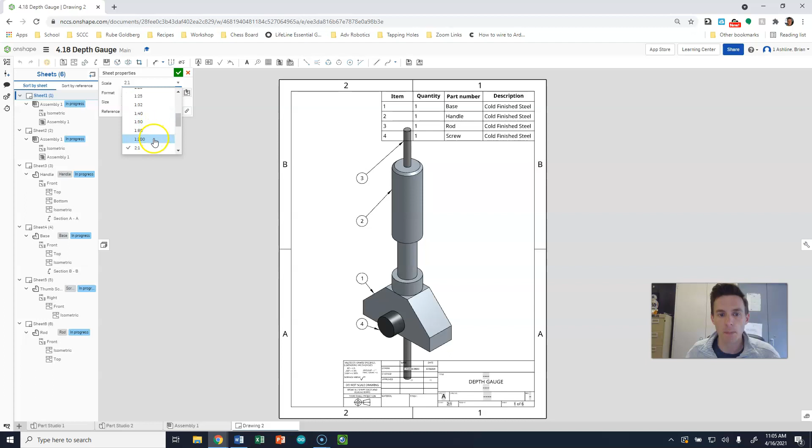So I could go to, let's say, a 2:1, and notice it changes the size. It also changes my scale down below. We also can see that honestly it's too big for that. So we're going to slide back up to 1:1 and we're going to leave it right there.

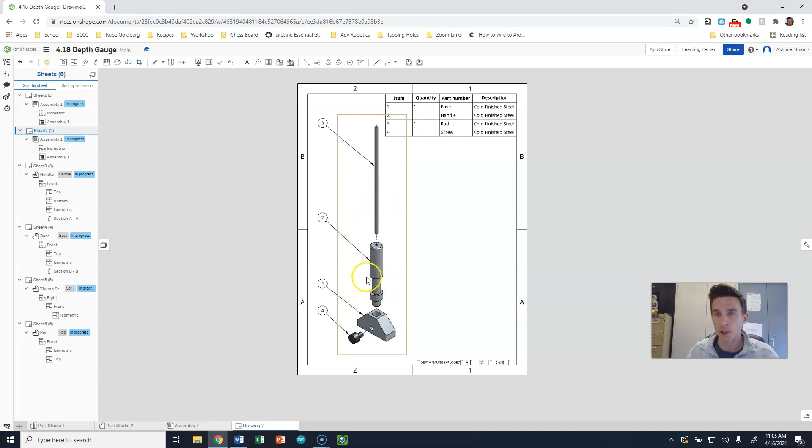As we move into sheet 2, we have our exploded view drawing, okay? And again, we have our bill of materials, we have our exploded view, which again should be arranged so that the base is at the bottom, and then these pieces build into it, and the screw comes in from the front. We have our part balloons, we also have our name and our proper scale.

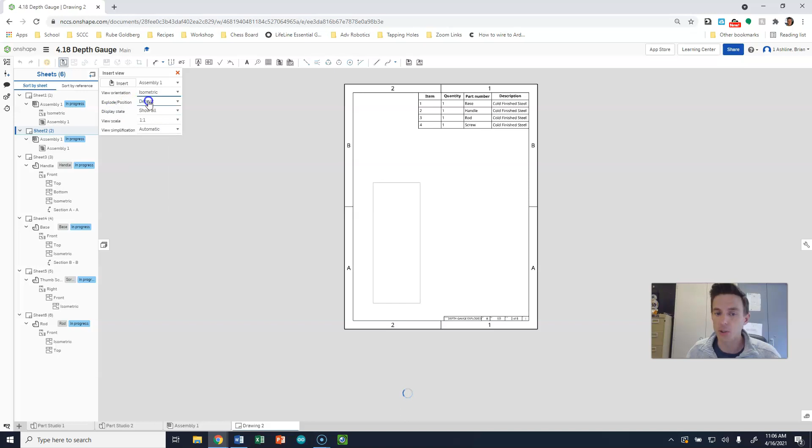Now I want to show you really quick how to put this in again, so I'm going to delete that. I'm going to go to Inserts. I want to select my assembly. I want to select an isometric view of my assembly. And underneath Explode and Position, right now it's default. We want to go to our exploded view. So mine's called Explode 1.

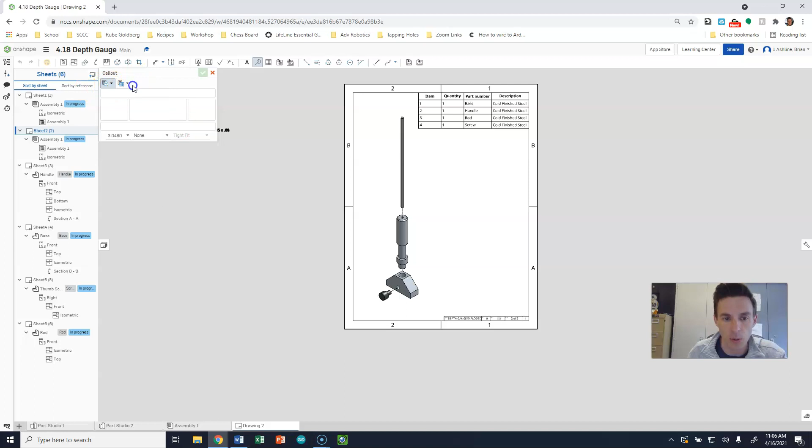We can wait till that thing loads up. We can then drop our exploded view in, right? And again, we're going to show our shaded view. We're going to pull in our callouts, which have been changed now that I've changed things around. So I'm going to bump this back. I'm going to say that I want it to be my part number. It's going to be a circle. You probably won't have to do that yet, but you might have to do that in the future.

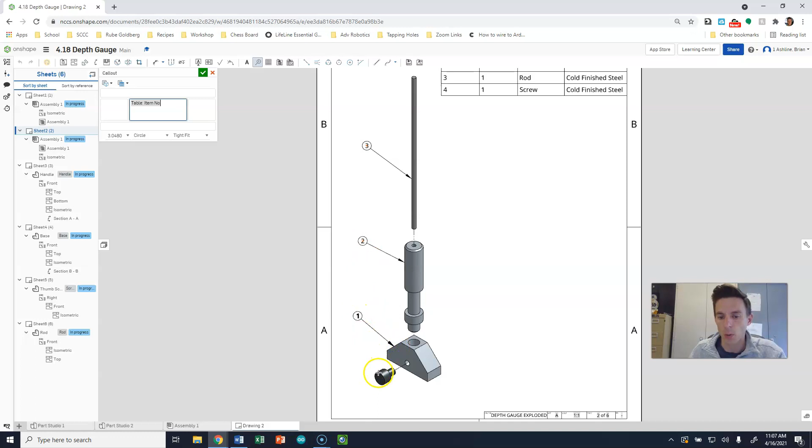Oh, not that. Yeah, I really needed to turn on my item number. See, it has my name there. So now I can come through here, put in my item number. Delete this one. I can continue with that process as we go down. Drop 2 in, drop 1 in, and finally drop part number 4 in.

Okay, now we're moving on to our next sheet, which starts all of our part drawings. Sheet 1 is always going to be your cover sheet. Sheet 2 is going to be your exploded sheet. But as far as your part sheets are concerned, I really don't care what order they come in exactly. Alright, so I'm starting with my handle. So let's just start with that.

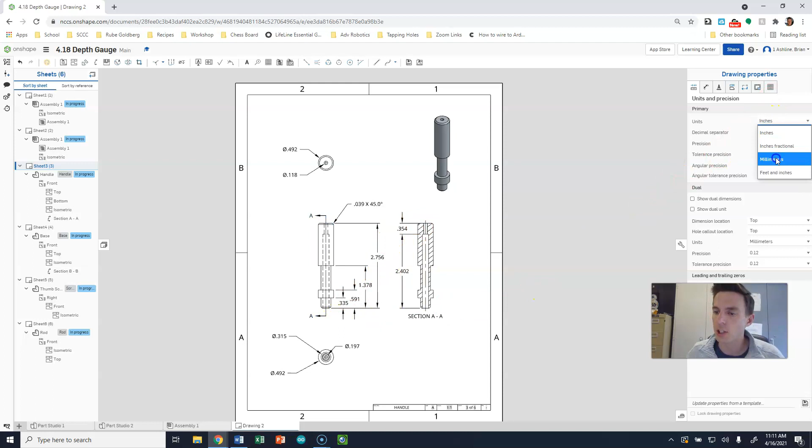The first thing that you're going to need to do for this drawing is change from inch units to metric units. We drew it in metric units already, but as you go to dimension, it's going to be dimensioning automatically in inches. So we need to change that first. So we're going to go to the drawing properties on the right. Currently your unit properties are going to be set to inches. You can see that everything has changed to standard dimensions. We want to change that from inches to millimeters so that we have the proper unit. Okay? So once we have that set, then we can start going through to set up our dimensions.

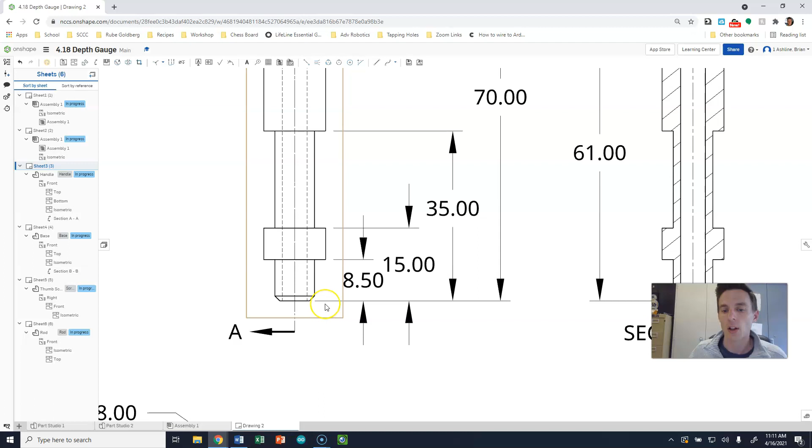And for this piece, because there's so many different parts, I have elected to use what is called baseline dimensioning, where all of my dimensions, especially in this view, land at the same point, which is the bottom of my piece. Baseline dimensioning is actually really great for manufacturing too, because you can measure off of the same point over and over again.

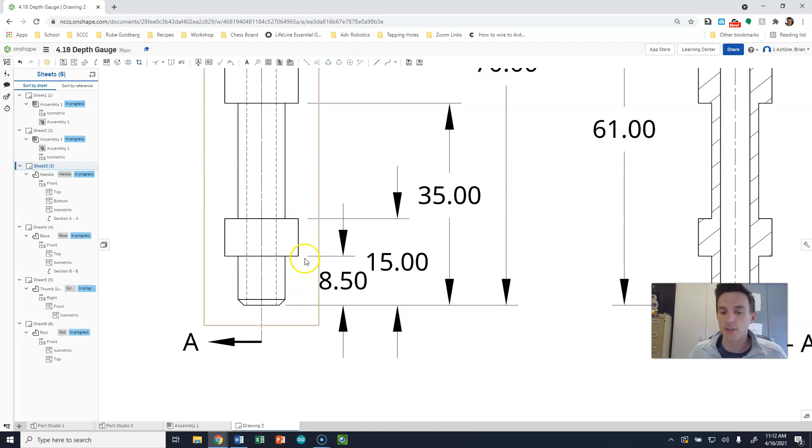So with that being said, when I went through to dimension, I dimensioned from my lines over and I selected my 8.5. And again, it's important that you're selecting the right side of your line. So if I go to dimension and I select a line and a line, oops.

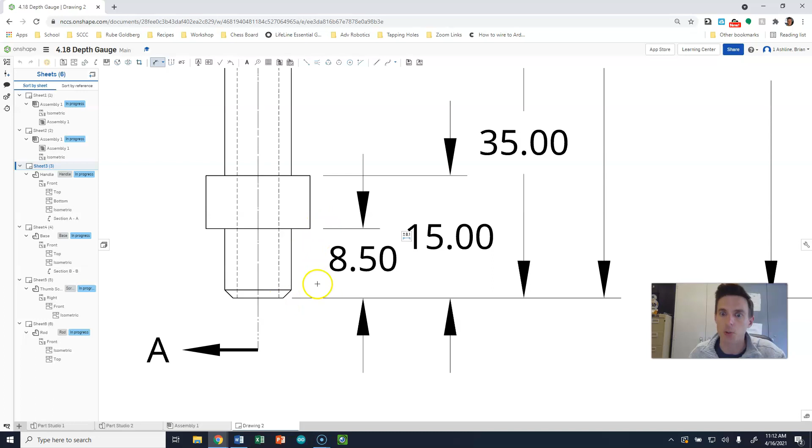Select the line and then this line here, it automatically puts a gap between my extension line and my object, which is great. If I were to dimension from, say, a point across the board and then bring this over, you can see that there's no gap between here and here, which is not ideal. Ideally we want gaps between our dimensions.

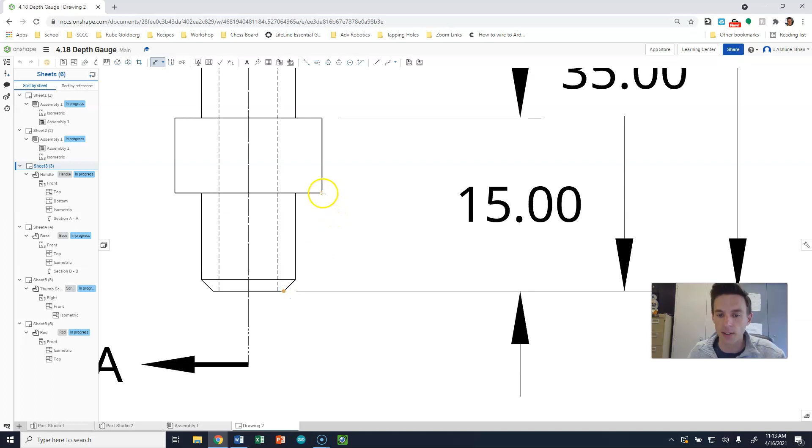So I would just delete that and draw it again, and I could totally select this edge to this edge, or that corner, and then drop it in at that point there. So I have my smallest dimension, which is 8.5 millimeters, my next dimension, which is 15, my next dimension to here, which is 35, and then finally my last dimension, my total height, which is 70.

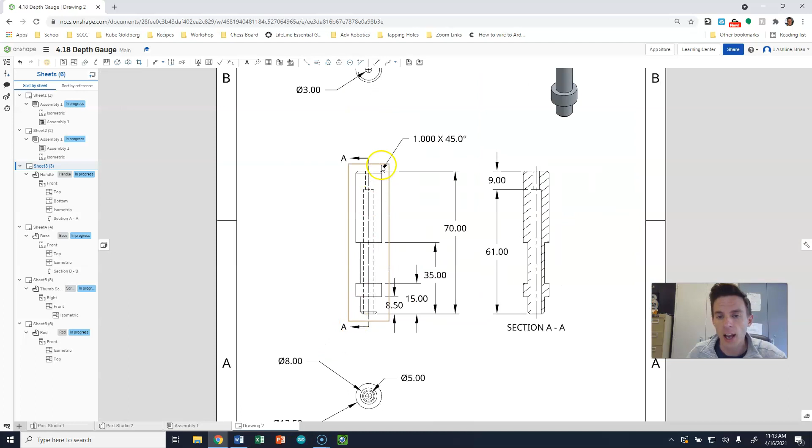Notice that I did not dimension to my chamfer down here, and I did not directly dimension to my chamfer at the top, although I have put in a chamfer note, which I want to show you how to do next. So the chamfer note is underneath our dimension tool, and we're going to go to chamfer dimension. The first thing we're going to select is the angle, and then the second thing we need to select is where that angle produces an acute angle.

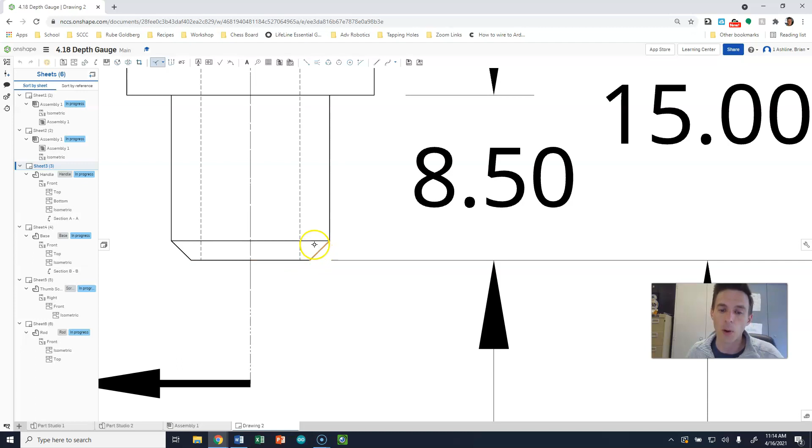And we're going to select that line. So again, acute is when we're less than 90 degrees, and obtuse is when we're greater than 90 degrees. When we look at this, we have an obtuse angle on the bottom here, and an acute angle at the top. So we want to select the other side of the acute angle. And now when we drop this dimension in, it comes out at 1 millimeter by 45 degrees. So that's excellent.

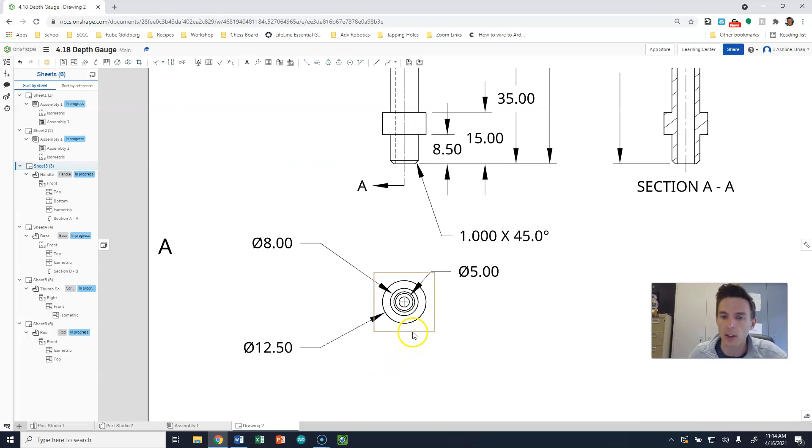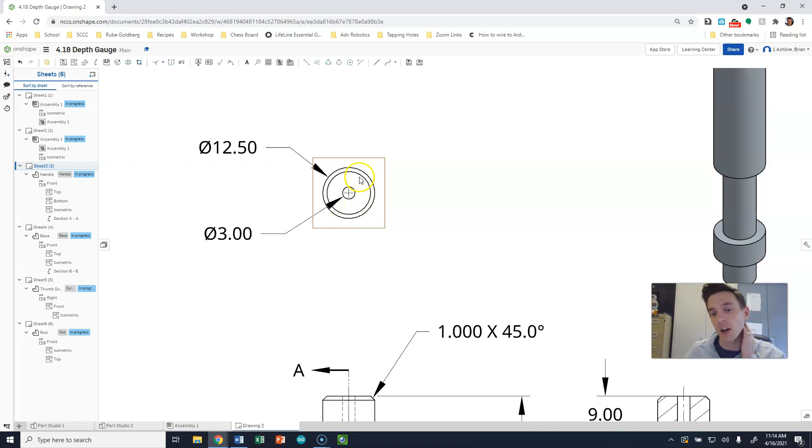The other thing going on with this, again, is you have to look at this a little closely. You need to determine what holes we really need. The innermost hole is that 3 millimeter hole. I've dimensioned that at the top. I've also dimensioned my 12.5 from the top. You can also see that I have neglected to add hidden lines in this view. Honestly, the hidden lines are kind of confusing in the top and the bottom because there's so much going on here. So I have elected to simplify my drawing by removing those particular hidden lines.

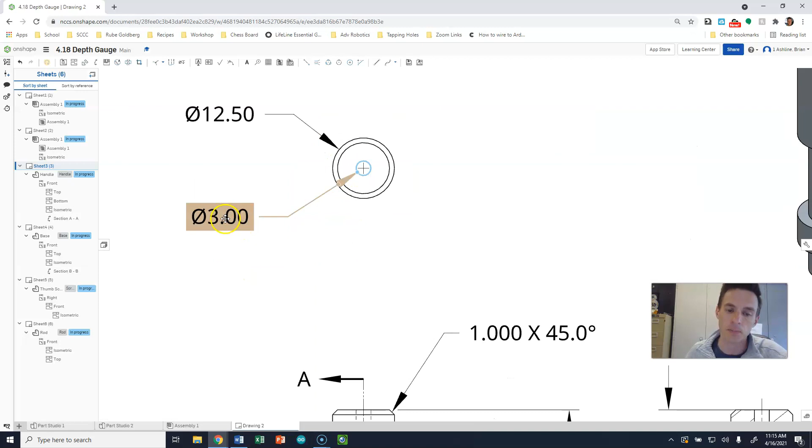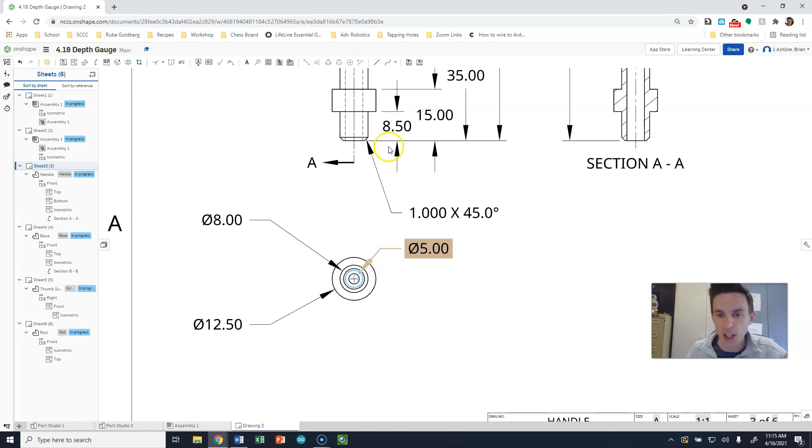I do have hidden lines in my front view, and we have a section view also, which we're about to talk about. But my inner diameter is 3 millimeters. They also mentioned that it was reamed on the drawing, which you could add, but you honestly don't have to, but you certainly could. So we have 3 millimeters there with a 12.5 there. Now again, we want to avoid our chamfer because our chamfer note is up here. We don't need to dimension it again.

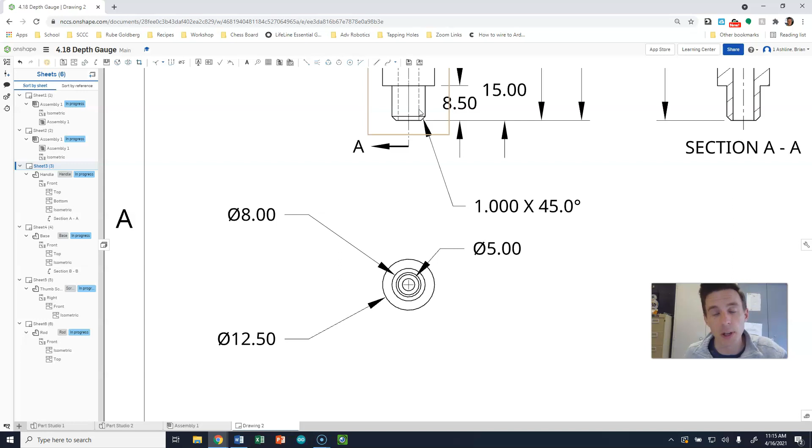So down below, you need to find your 5 millimeter hole, which is the diameter of the bigger part here. You need to find the 12.5 millimeter exterior, which is the bigger part here. You need to find the 8 millimeter part, which is this part here. Again, we always want to dimension to the circular portion of a drawing. It makes things easier to understand later on.

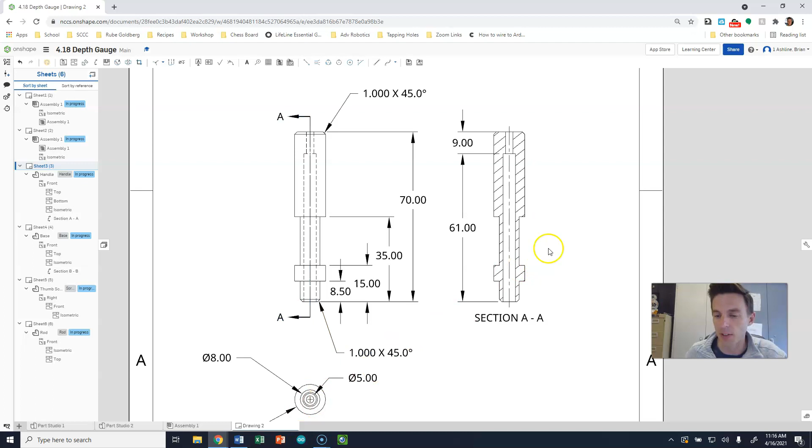Then I created a section view, which again, sections are at the top, right here. I created a section view down the center of this object, which allowed it to be sliced in half. I added my center lines and center points everywhere, as a matter of fact. And here I elected not to do baseline dimensioning, but just dimensioning from the bigger portion, which is my 8 millimeter diameter, and then another dimension for my top 9 millimeter piece.

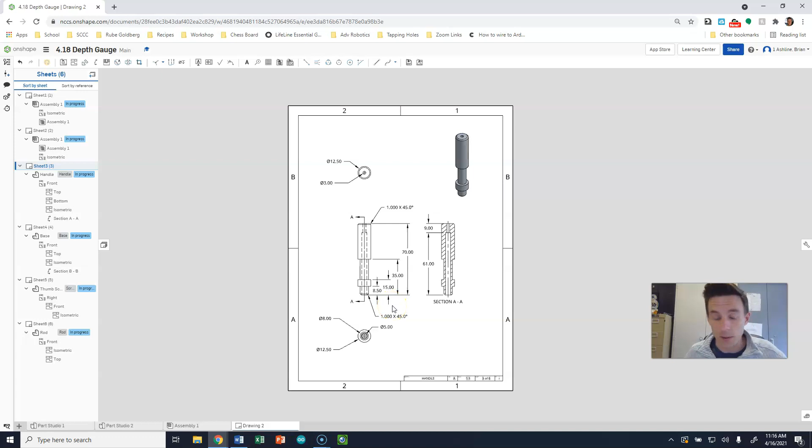So let's see here. Baseline dimension, chamfer note, circle, diameter, section view. Okay, so that covers all of the notes that I have for this one. Again, title, scale, isometric view. Here we have our base. Okay, and as we start to look at this dimension again, my circles I'm dimensioning from the top.

I'm not dimensioning them from the side. Here I do have all of my hidden lines on, and again I have a section line drawn down the center of my piece to produce a section on the right.

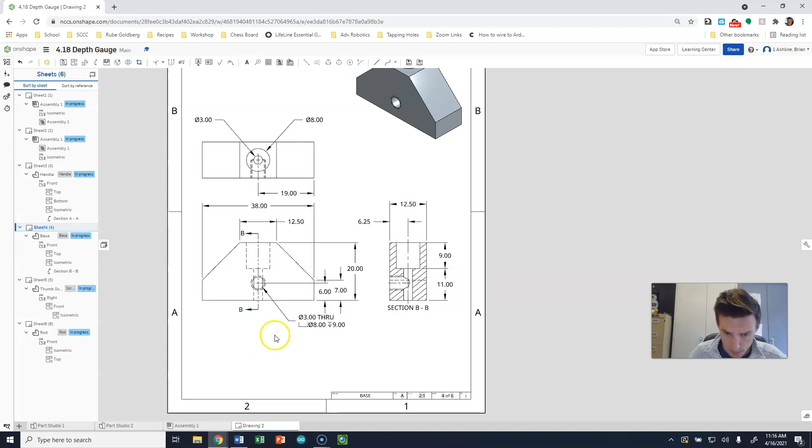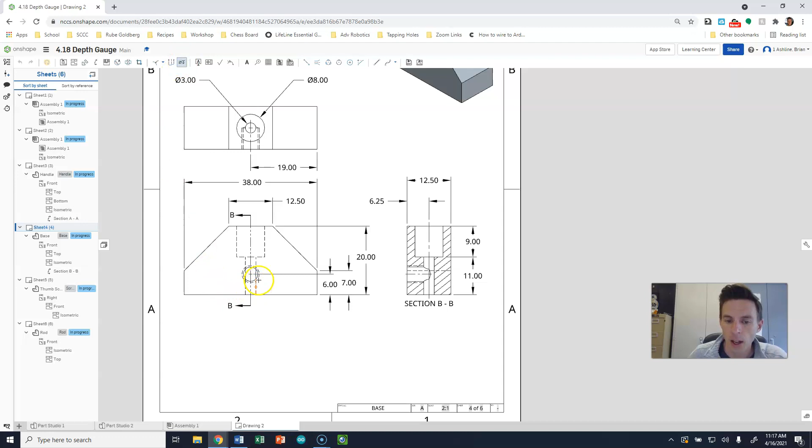So one thing that I do want to remind you folks about is the hole callout tool. So for internally threaded holes, we can use the hole callout tool. Again, externally threaded rods don't work out so well, but we can come up to the hole callout, and then we're going to grab the hole. And again, you should see these hidden lines around here because you have that threaded tapped hole there. And when we come down, we can drop this in place, right?

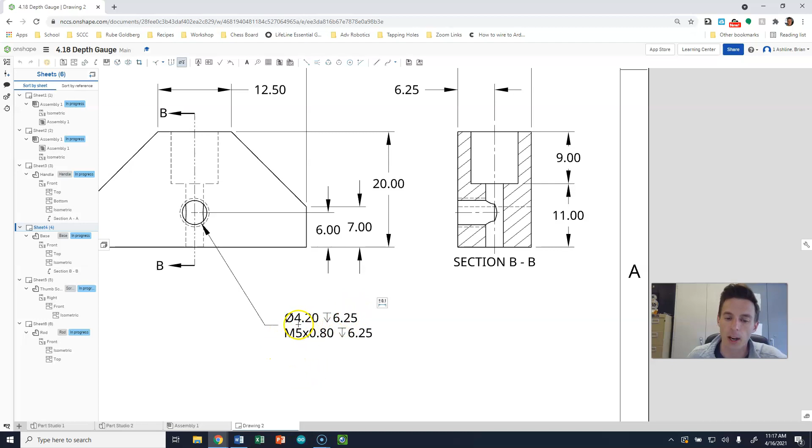And this says that my diameter is 4.2 millimeters, which again is the tap diameter of an M5 screw. That hole goes down 6 1/4 millimeters. Then my thread callout is an M5 by 0.8. So again, when you look at this thing in your model, you're only going to see the interior dimension of this hole, but here in this drawing you see the exterior diameter of the hole too, which is that 5 millimeter M5 external threaded hole.

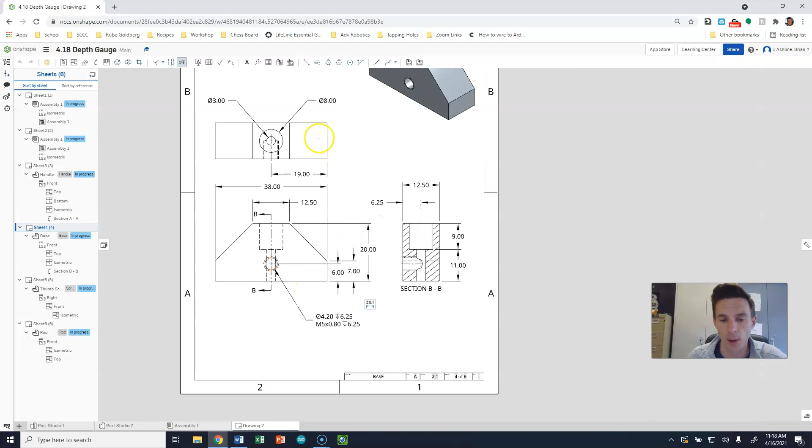Again, I've added my section view, and of course everything else here. Alright, so I have my diameters for my holes, I have the distance to the center of my hole, I have the distance here. Here I've kind of broken up my length dimensions because when I dimensioned between here and the center of this object, that dimension's like running straight through that 12.5, and I just didn't like that, so that's why I bumped that dimension up to my top view, going to the center there. I have my depth dimensions over here. I also have the depth of the holes in my section view.

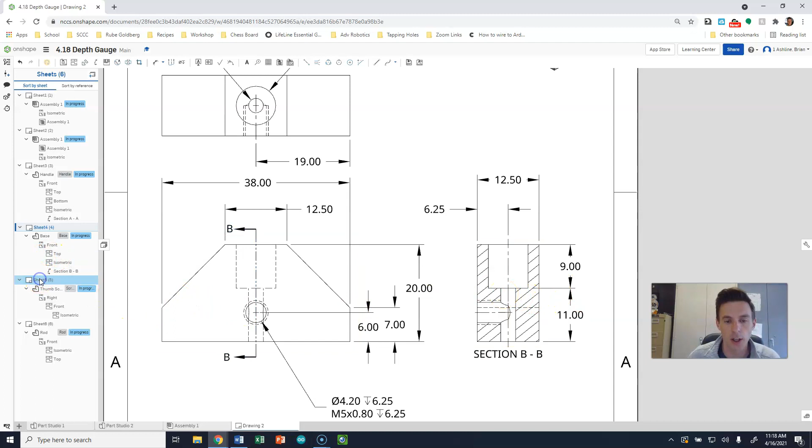Okay. Moving on to the screw next. Screw's really basic. I have done a pretty big scale here because it's such a small part. I have my length dimensions, I have the overall diameter of the thumb part that we actually turn, and then we need to create our own callout for the thread type, because again, external threads are not well done in Onshape. So in order to do that, we're going to grab our callout tool, and we're going to need to edit how this thing works.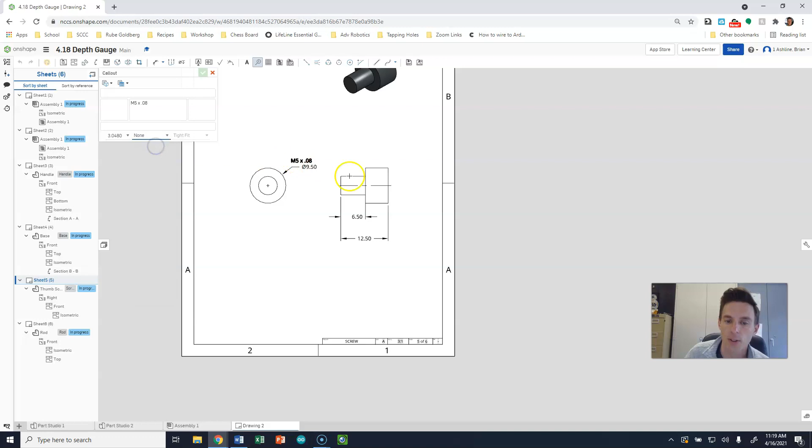So we're going to get rid of table item number by deleting that, and we are going to type capital M5 by, which is an X, .08. Okay, and that's going to reference our thread. We're going to turn off the circle. Now we're going to select this point and drop our thread notes on here. Don't put a thread note or a diameter here. This references what it should be moving forward.

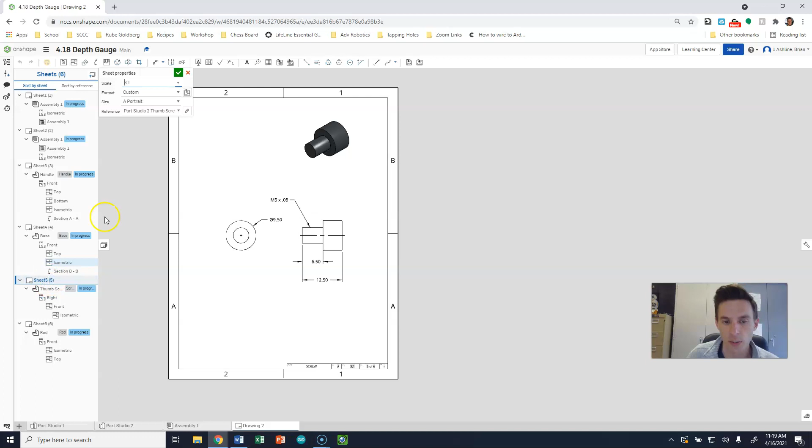Okay, and again, isometric, title, scale. Again, if you want to change the scale of everything all at once, double click on sheet 5. And you could even bump this thing up to like a 4:1. And that's perfectly acceptable too. And again, that automatically changed the scale for me at the same time.

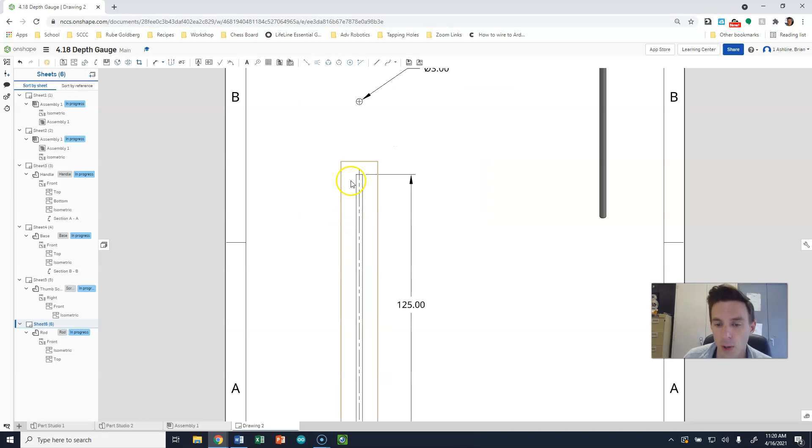Last but not least here, I have my rod. Certainly, it is the easiest drawing that you're going to do here. You bring in your rod, add your center line, your center point, dimension the height, dimension the diameter, put in your isometric view, name it, make sure that your scale is accurate, and that pretty much wraps up the sheets at that point, you know?

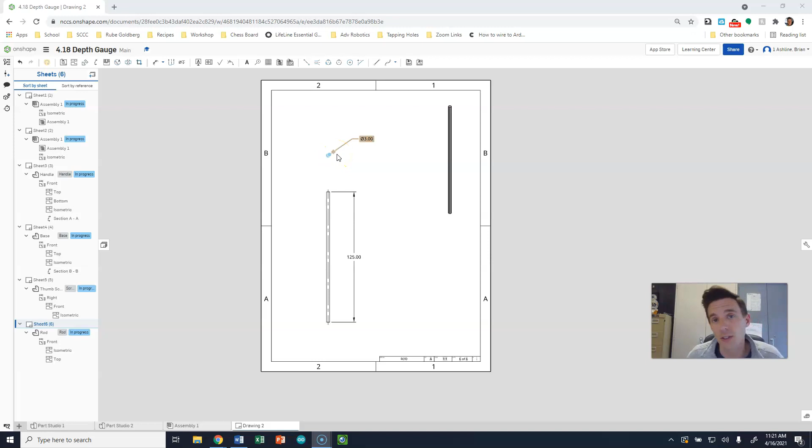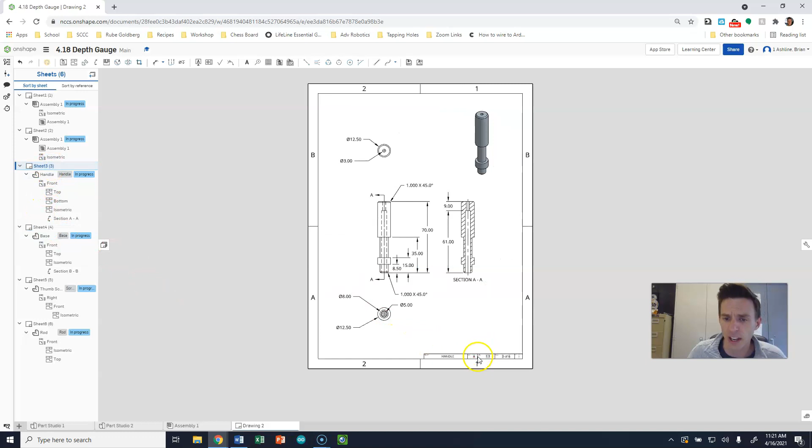So again, make sure that you have center lines, center points, make sure that your dimensions are easy to read, make sure that things are as clear as possible, that your dimensions are not overlapping one another, that they're all within your border lines, nothing should extend beyond your border lines. Make sure that they're in metric units, make sure all of your circles and cylinders have center points and center marks. Make sure that your scales are accurate, and just double check your sheets before you turn them into me.